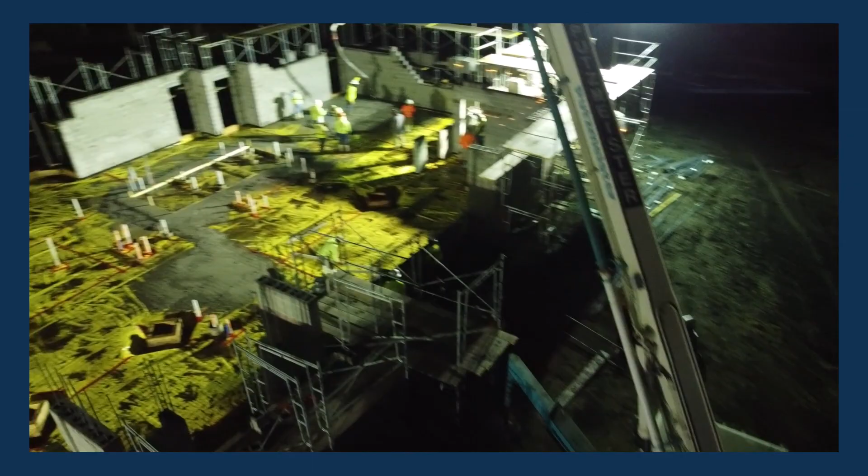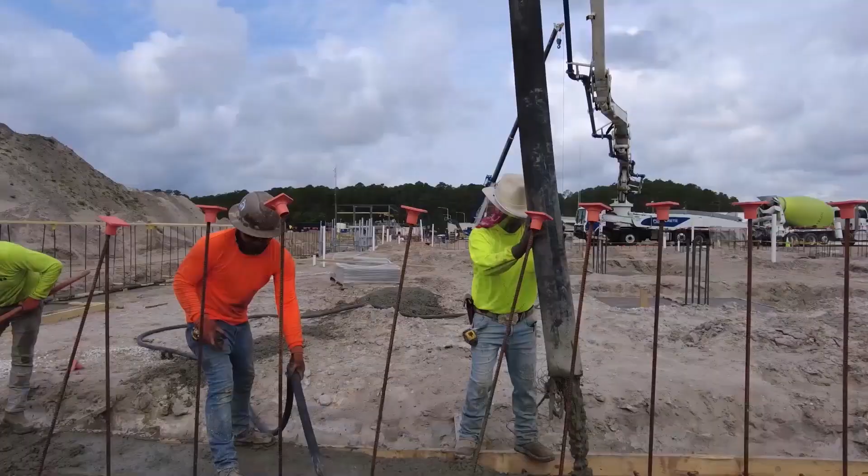Think of construction, one of the first things that come to mind is concrete. This widely used construction material is literally the backbone of the construction industry. But before we can become successful in the concrete scope of work, we have to understand the precautions we must take to ensure our safety and the safety of others during concrete operation.

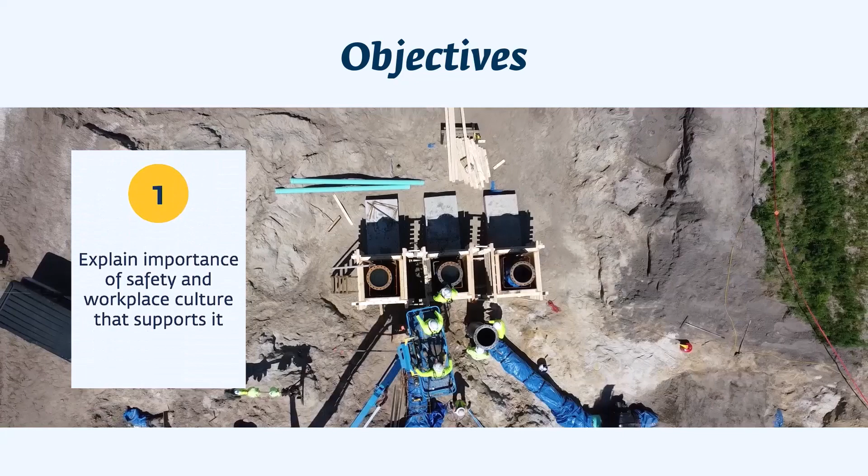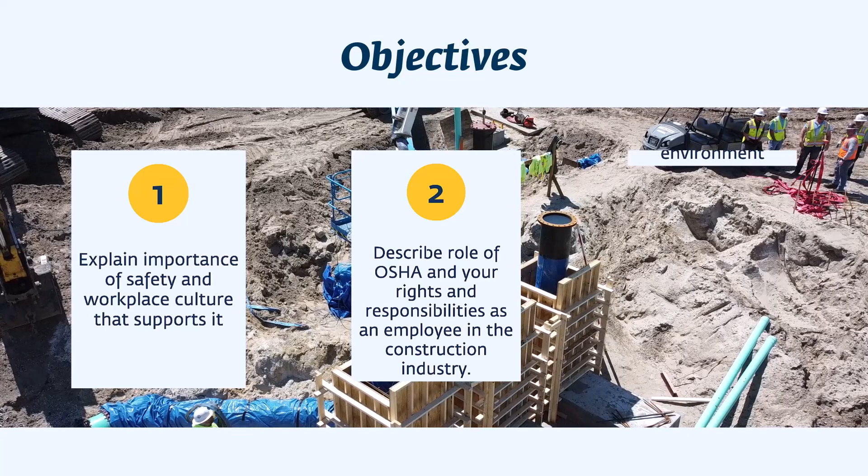Our objectives for today are: first, we need to understand the importance of a well-working safety culture in the workplace and how you can support it. Second, describe the role of the Occupational Safety and Health Administration and what your responsibilities and rights are. Lastly, identify common types of hazards on site that can cause serious injury or worse, a fatality.

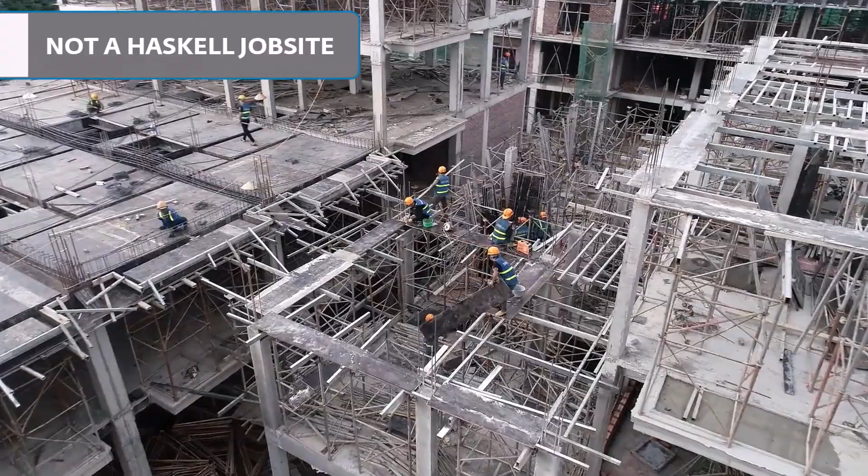So what does a job site look like that does not have a working safety culture? There are a couple of things you can almost immediately point out when you observe the activity on site. One of the first things you will notice is a lot of at-risk behavior: nobody's tied off, housekeeping is poor, or individuals jumping over spots that have no access.

Another thing you will notice is poor planning for the operation. No one seems to have what they need, and people generally look lost. Then there's the lack of training: operators with no seatbelt on and craft walking down ladders without three points of contact. Basically, the job site has developed a culture that has failed to support their craft and give them the tools they need to recognize hazards, to not only protect themselves, but others around them.

And we all know that truly experienced craft workers understand the commitment to safety, and that their hazard recognition abilities will be tested every day out on the job.

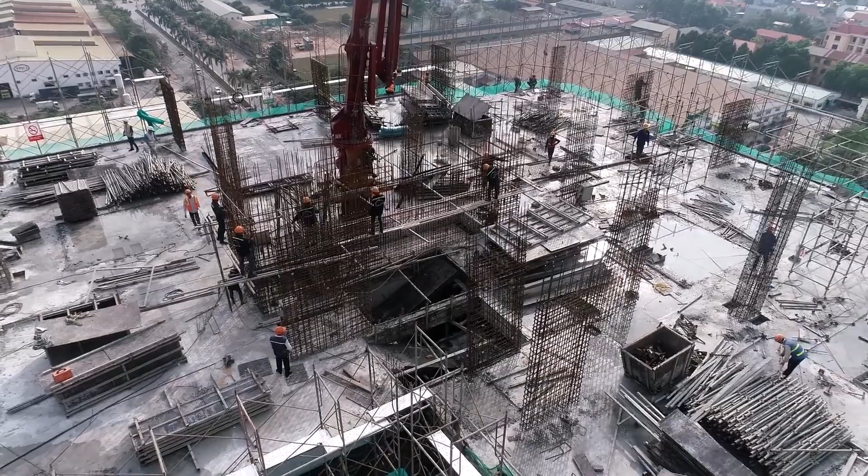If you are still confused on the importance of safety, then let me spell it out for you. We don't want anyone to get hurt or die in the process of construction. We spend more time with each other than we do with our own families, and we should all make sure we get back to them with all our fingers and toes. That's why we are committed to keeping you and everyone around you safe.

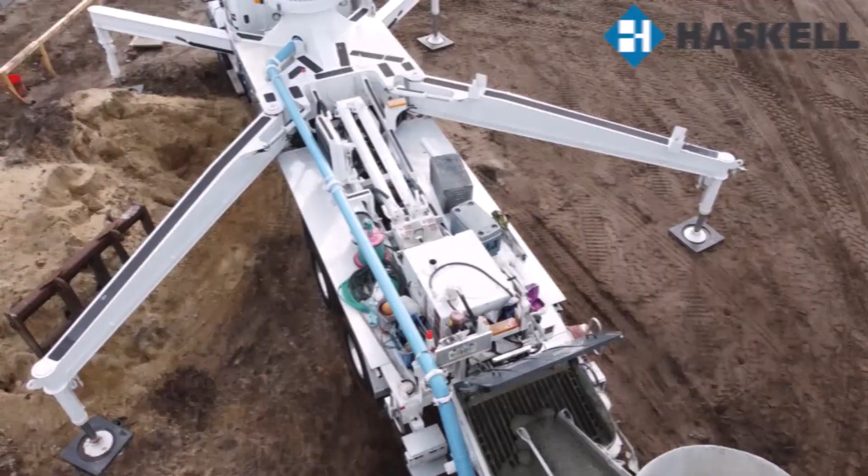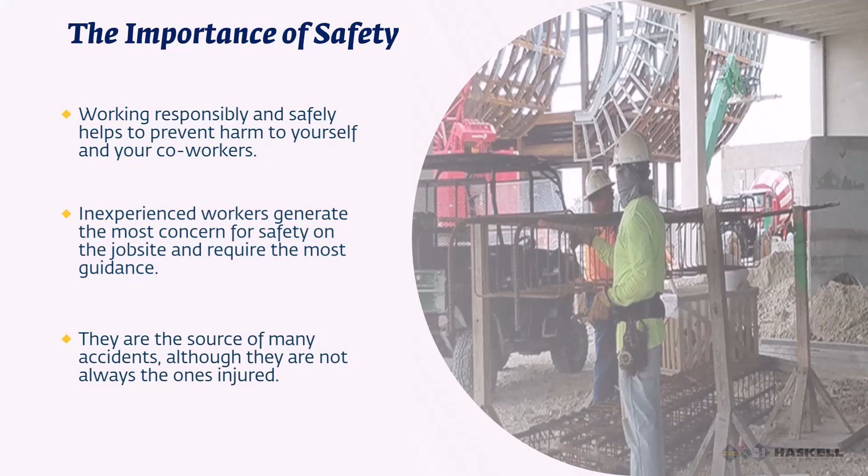But here's the thing, we cannot do it without your help. We need everyone working responsibly and safely to ensure our main goal to provide a healthy and safe working environment. We encourage you to help our inexperienced craft with hazard recognition, because we all know they are at the most risk, and they are in many cases the source of the accidents and near misses on site, even though they are not always the one getting injured.

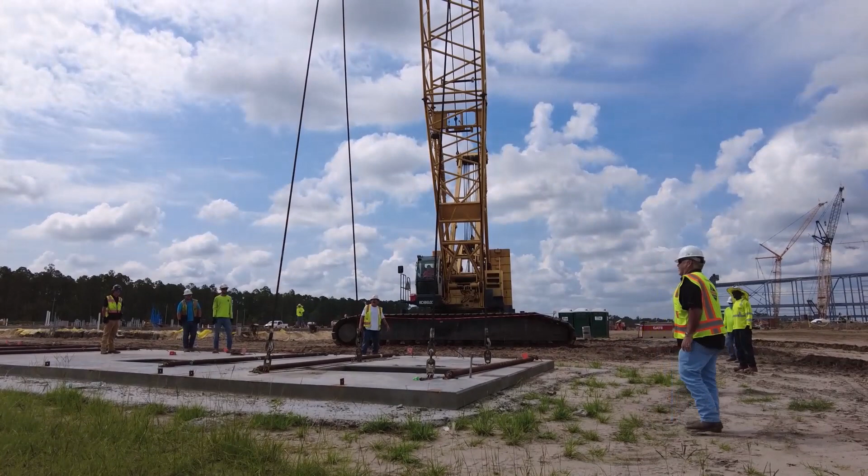So when you get a chance, mentor our inexperienced craft on hazard recognition, and who knows, the life you save may be your own. At this point, you may be asking yourself what makes an effective safety culture.

Well, let me tell you. First, we need to have or maintain a sound safety policy, which we do have. This policy needs to be understood and incorporated out in the field with a good attitude.

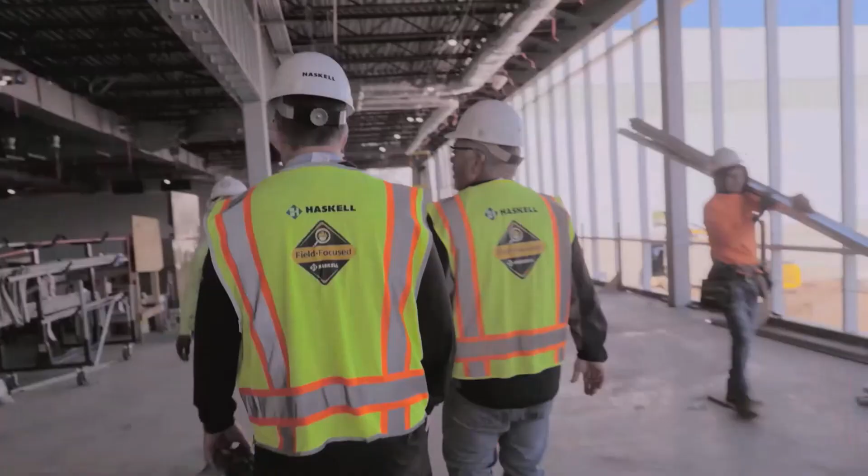Second, this policy should be communicated throughout our leadership, both in the field and in the office. We must leverage our strong leadership skills out in the field to involve and encourage the commitment of our policies by our craft, subcontractors, and field personnel. Remember, if the policy is not understood, agreed upon, or not effectively communicated, the policy will not translate out in the field where it is needed the most.

And finally, we need to actively train our personnel with positive reinforcement on the necessary safety skills needed for each type of operation, as well as how to adapt to the changing conditions of our projects day to day.

Let's take a closer look at the role of the Occupational Safety and Health Administration. It is their mission to enforce that companies provide a safe and healthy environment. To do this, they have created several parts of the Code of Federal Regulations. In construction, we focus on parts 1926 and 1910.

1926, concentrating on construction, and 1910, containing the general industry standards. With these standards, we have all the information we need to ensure we can create site-specific safety plans and job hazard analysis forms to promote our safety culture.

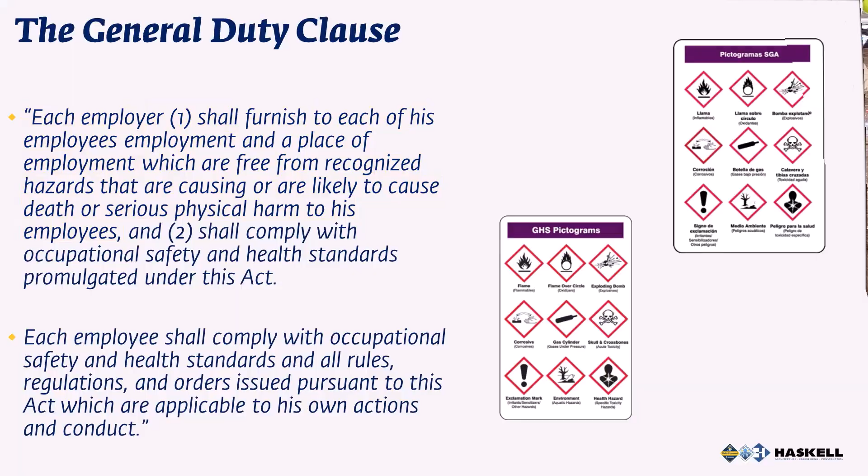But what are you and your employer's responsibilities? Well, under the General Duty Clause, each employer shall furnish to all employees a place that is free of hazards that can cause death or serious injury. They also must provide training and personal protective equipment for operations that have these types of hazards.

What about your responsibilities? You have to follow the safety rules, wear personal protective equipment, and participate in the training provided by the employer. I also like to mention that you have the right to address any issues with your supervisor and report any issues if not corrected.

You are also protected by Section 11C of the OSH Act from any discrimination or discipline if you do decide to report any issues. For more information, I encourage you to reach out and get your 10-hour safety course where you can learn more about this subject.

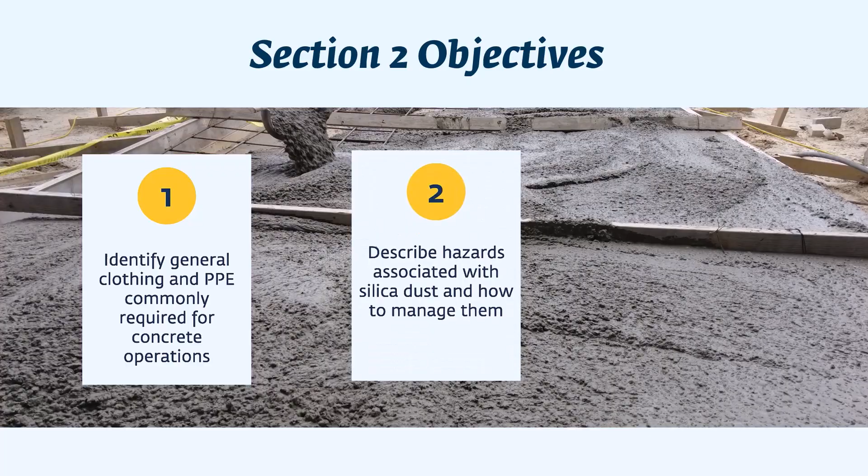There are several ways that concrete can be a hazard: skin contact, inhalation, and the handling and forming of the concrete. Let's first focus on skin contact.

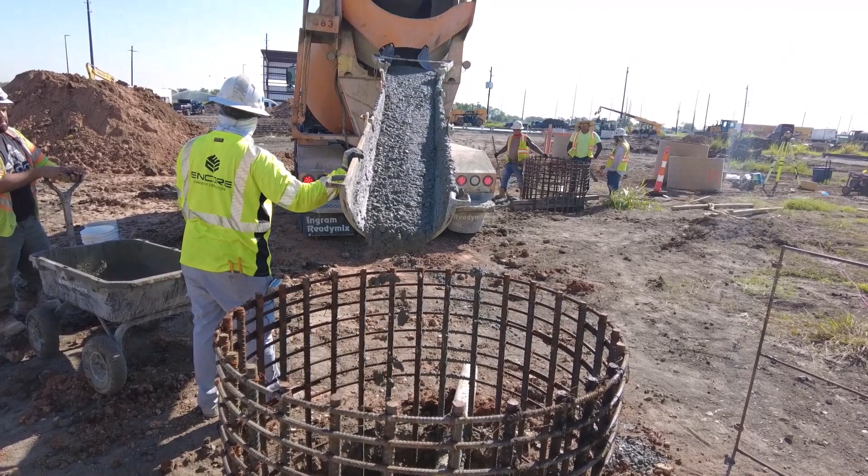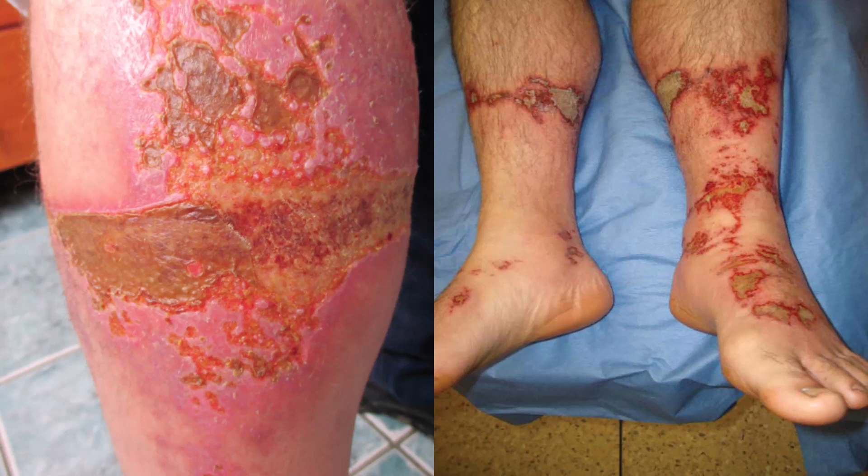For many people, concrete can have adverse effects to their skin and health when they come in contact with it. Cement is alkaline, or has a high pH level. Cement is highly caustic or corrosive. Once you mix dry cement with water, it has a pH of 10 to 12 on a scale of 14. That level of pH is high enough to cause chemical burns on unbroken skin with extended contact.

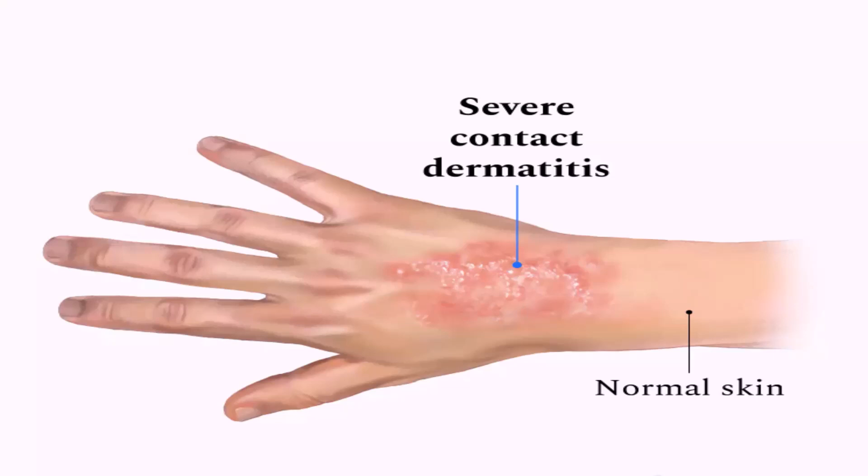If that's not enough, Portland cement also contains the metal hexavalent chromium. It's the toxic chromium that sensitizes your skin and causes contact dermatitis. Hexavalent chromium has been classified as a carcinogen, or causes cancer. Certain epoxies, accelerators, water reducers, superplasticizers, retardants, and other admixtures in concrete can also have a sensitizing effect.

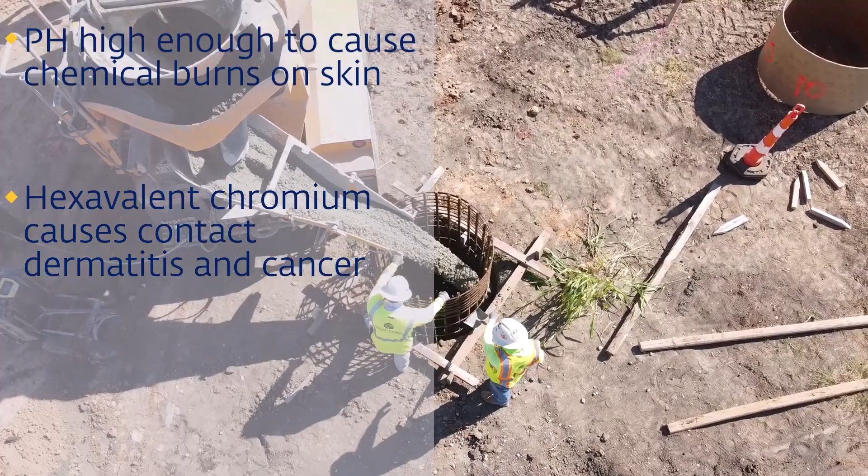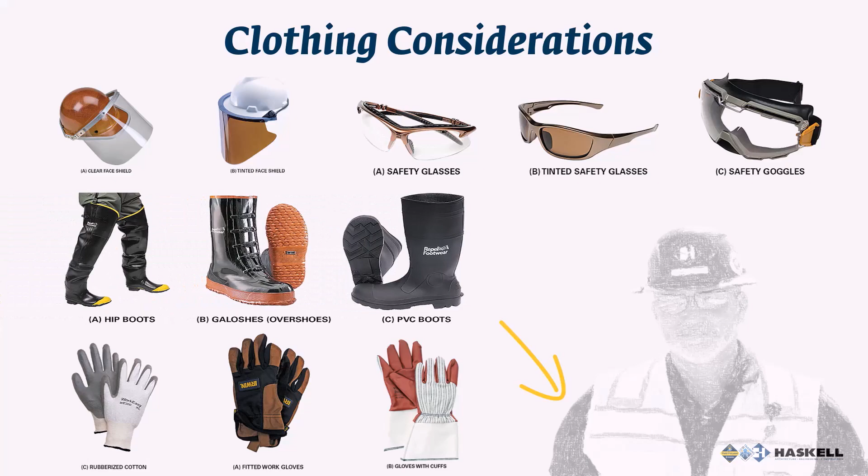Concrete is also highly abrasive, creating microscopic cuts and scrapes on your skin. This allows the alkaline, toxic substance to contact deeper tissues and worsen the injury. That is why we must use the right personal protective equipment, such as gloves, long-sleeve shirts, safety glasses, face shields, and waterproof boots to prevent the concrete contacting our skin and causing injury.

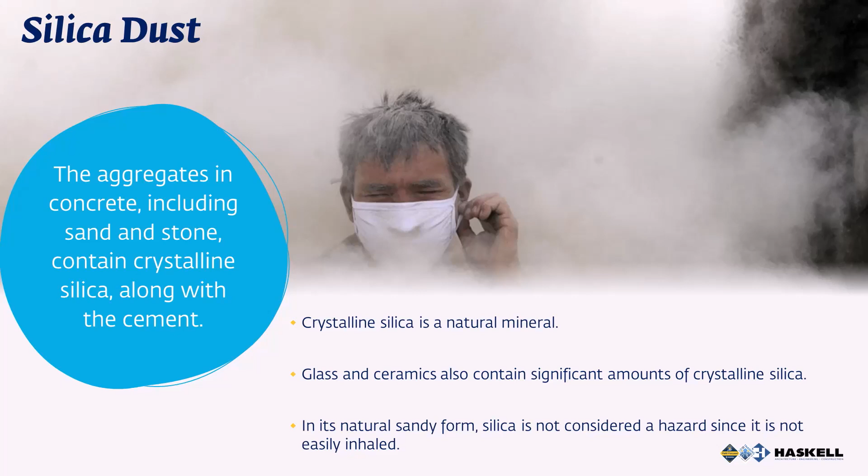And if we come in contact, we have to wash off the concrete with plenty of clean water and contact your supervisor immediately. Skin exposure is only one of the hazards, and most fail to recognize that the dust created when working with concrete can also have consequences.

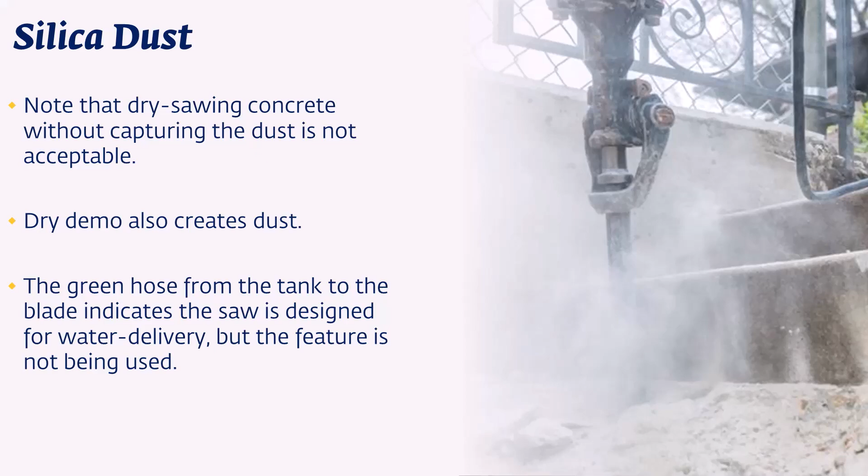Whether we are cutting control joints, grinding surfaces, sweeping the floors, demolishing sections, or drilling holes for epoxy anchors, those types of activities cause plumes of silica dust. When this dust is inhaled, silica dust particles, which are 100 times smaller than a grain of sand, enter the lungs and can cause severe and sometimes fatal diseases.

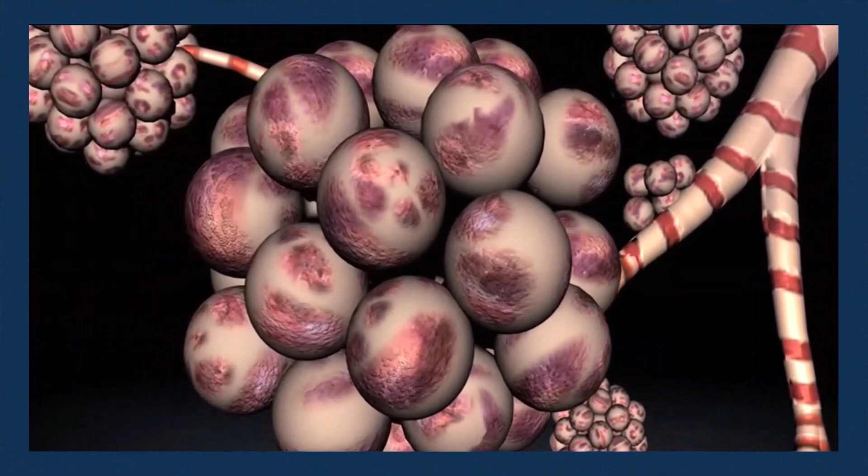This risk is exponentially increased by long-term exposure. Just think about this material collecting in your lungs and solidifying slowly, leaving those parts of your lung unable to absorb oxygen. The majority of these diseases are irreversible and many can be fatal.

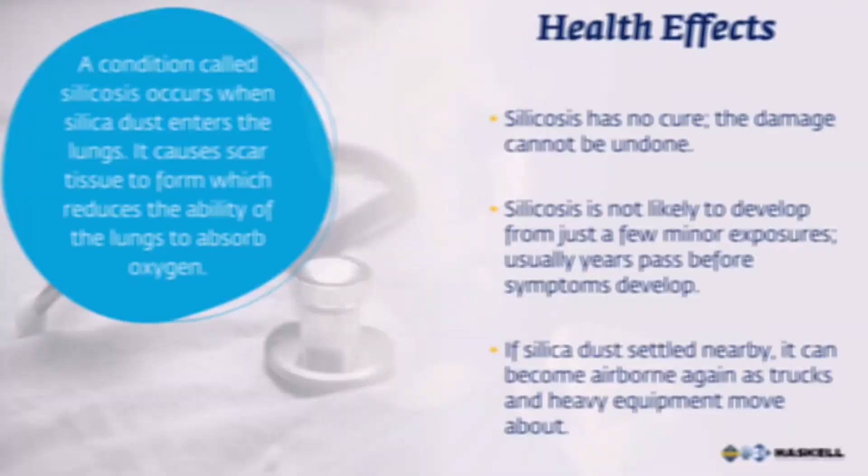Crystalline silica is a known carcinogen and can put workers at a highly elevated risk for lung cancer, chronic obstructive pulmonary disease, and kidney failure. Exposure to respirable crystalline silica has also been linked to the development of autoimmune disorders and cardiovascular impairment.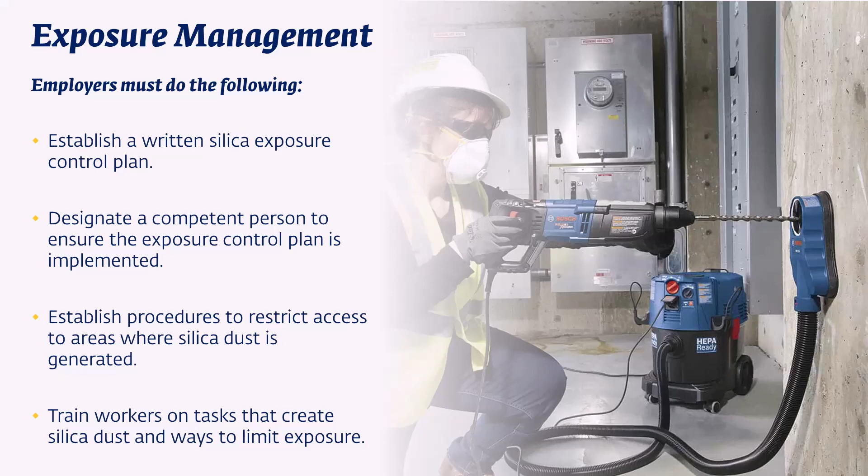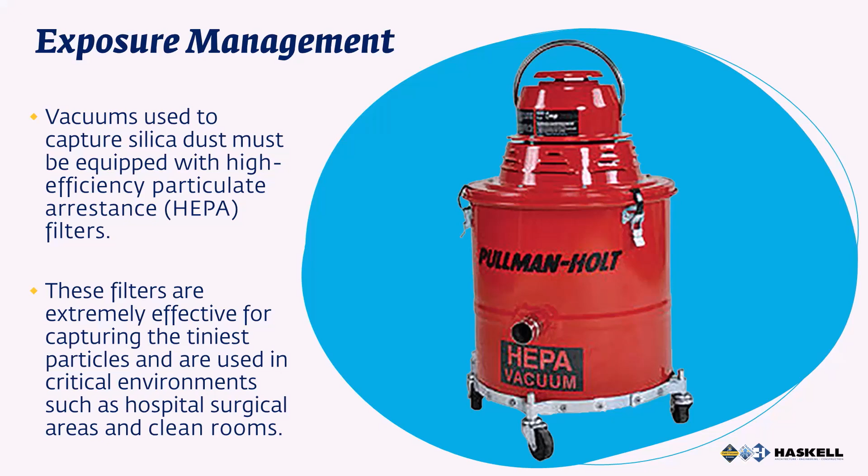We must protect ourselves and those around us when we are cutting, drilling, or grinding concrete by using exposure management. Exposure management is a plan to use water, marking off areas of exposure, vacuums for dust collection, and having the right personal protective equipment, like a mask, to protect ourselves and others in the area.

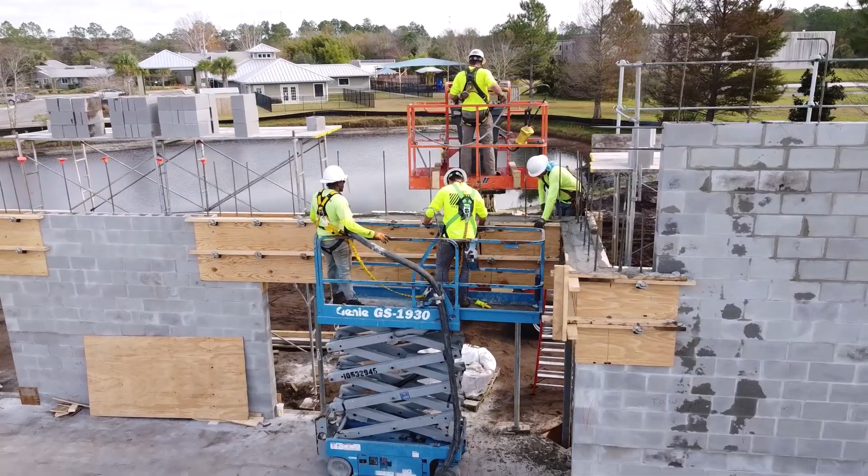Now that we can understand the hazards of skin exposure and inhalation, we can focus on the handling and forming hazards of concrete. Each concrete operation should be carefully planned and communicated before any activities start.

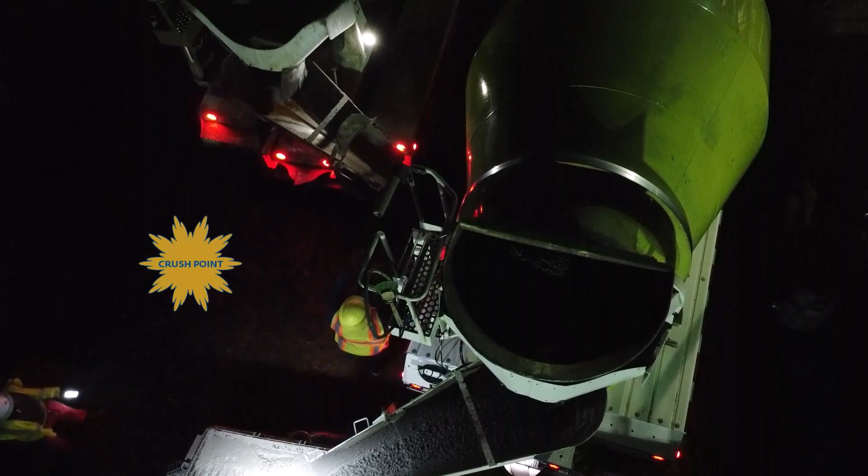Concrete is delivered to the site in two ways: by truck or by hand. If we are getting the concrete by truck, we can expect a fully loaded truck mixer that typically weighs approximately 30 tons to show up. Most of the time, these trucks will have to be backed into position and will need a spotter. Poor ground conditions can lead to delays or rollovers.

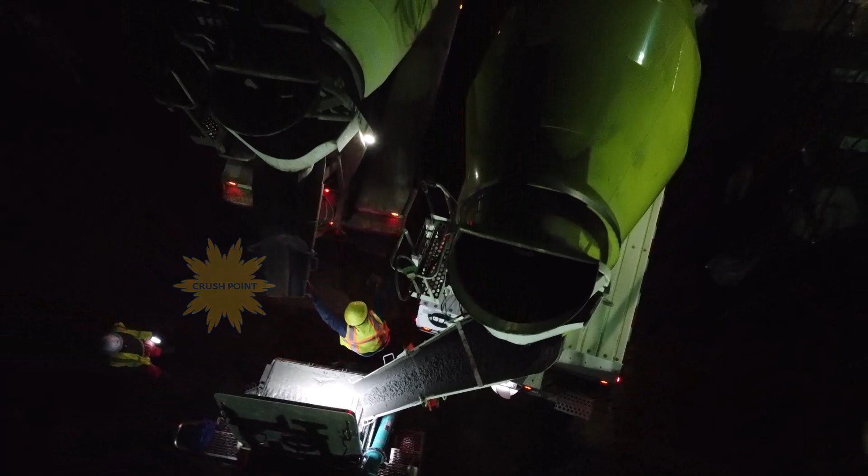Also expect caught-between hazards and equipment crush points when backing up the mixer to either the pump truck or close to the placement area. When shooting the concrete, it can splatter drops around the hopper or forms which could come in contact with your skin.

Having eye protection and other PPE to cover your skin is a must. Mixing on site can be hazardous as well.

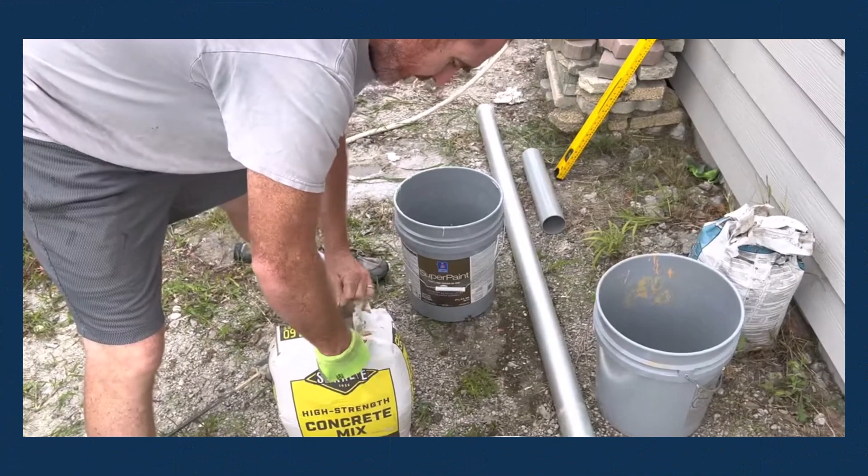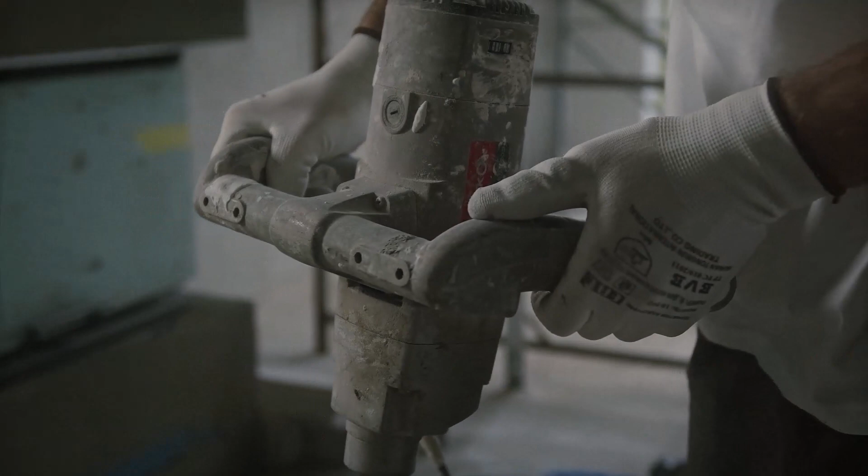Transporting 60 to 80-pound bags of concrete, if lifted improperly, can cause back strain. Opening the bags releases silica dust into the air. Mixing the concrete in the buckets releases dust and splatters droplets that can come in contact with your skin.

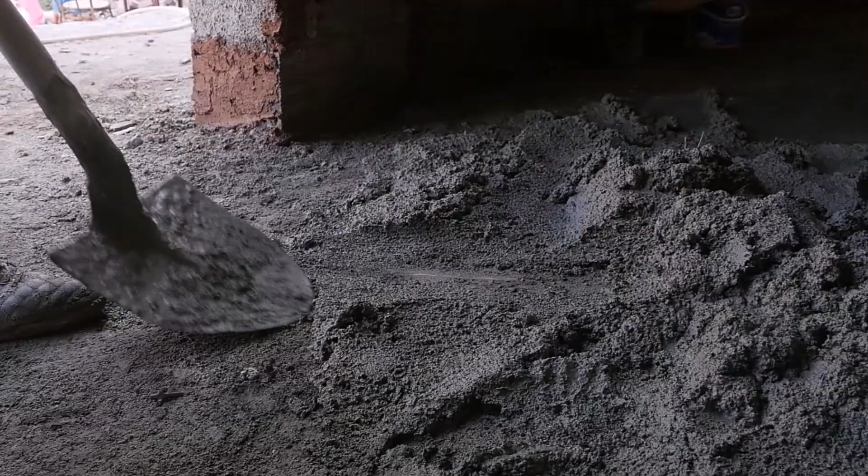Improper use of the hand shovel can twist your wrists and cause spraining. Bringing those loads to the area by hand can lead to other types of awkward movements that can cause further sprains or falls. Most of the time, transporting concrete by hand is cumbersome and requires an amount of energy from the crew that can be exhausting. So we like to use equipment to transport our loads of concrete to the placement areas.

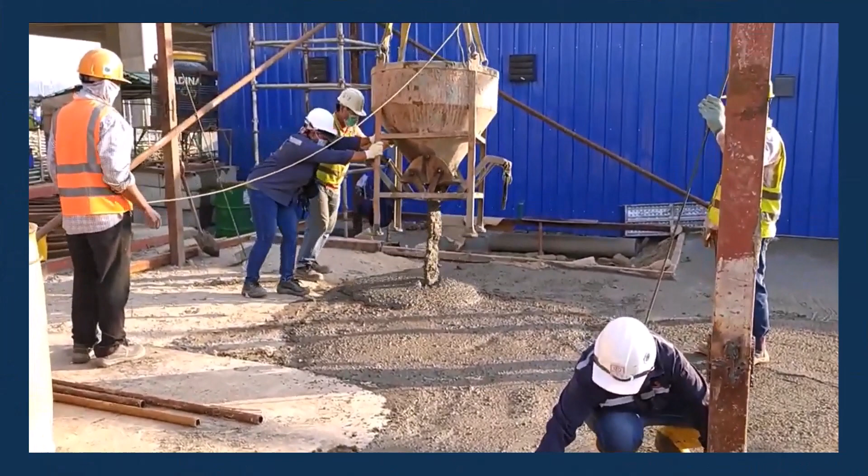There are 3 basic types of equipment we will use to do so. For short, level runs, we can use the wheelbarrow. A useful tool, but can also be a hazard if it is overloaded or the access to the placement area is not cleared and prepped for it.

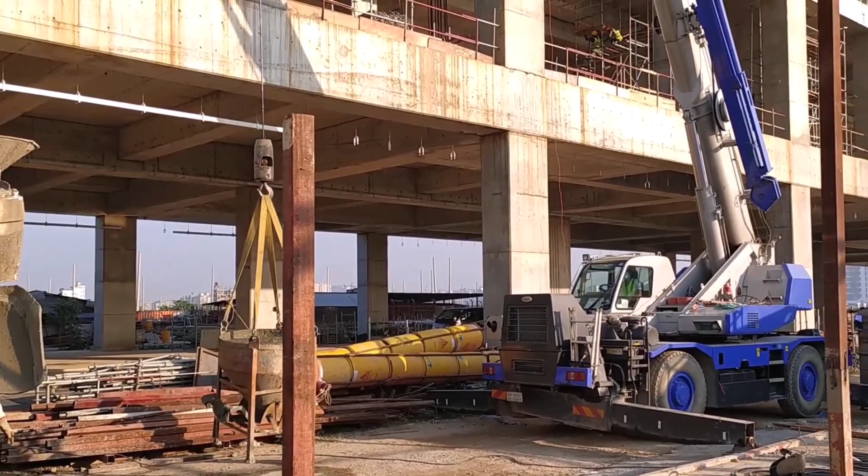Concrete buckets are great, but the risk factor is increased. We will need to understand load charts and have a pick plan in place to use the crane. With a crane comes the requirement of certified riggers, spotters, and a single crane operator. Having a 4,500-pound bucket full of liquid concrete flying over the site is risky business and must be treated in a professional manner. If even a small amount of concrete falls from the bucket, it can be deadly.

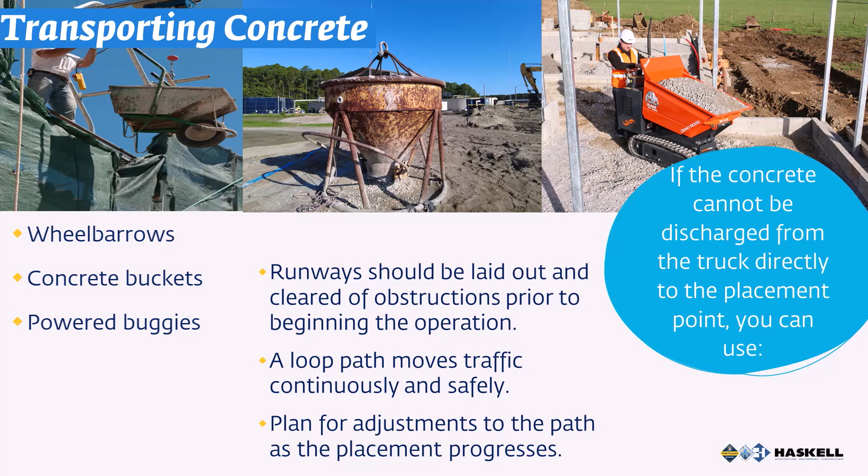Lastly, we have the concrete power buggy, or Georgia buggy. Another great way to transport large amounts of concrete, but also is heavy when loaded. Needs a spotter, pre-planned access routes, and can injure the operator or other workers in the area if not operated properly. All these types of equipment are great for transporting concrete, but all these types of operations still need to be planned and communicated to the entire team.

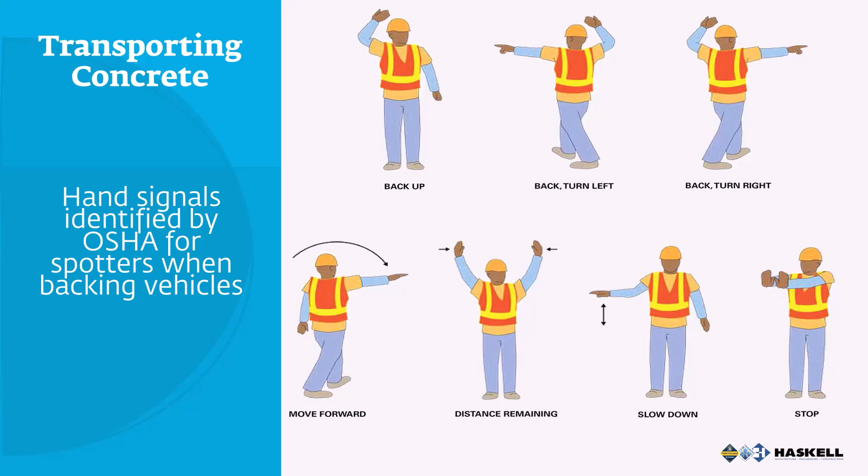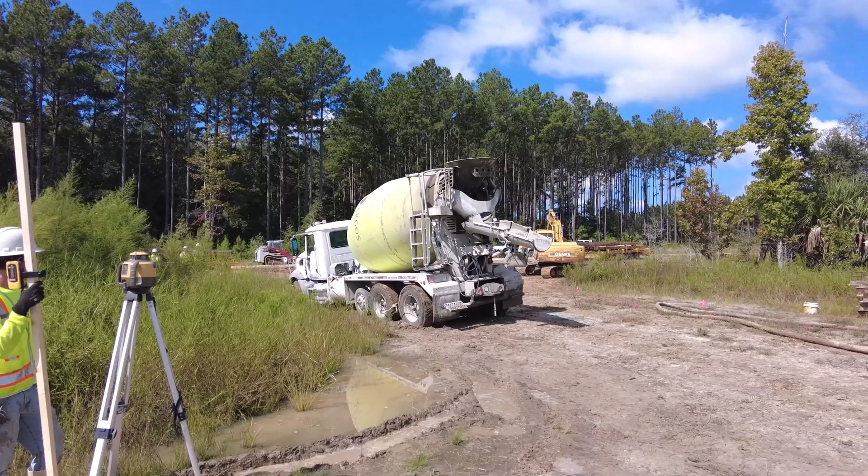When communicating the plan with your team, here are some hand signals identified by the Occupational Safety and Health Administration for spotters when backing up equipment. Before each operation, make sure both the operator and the spotter understand these signals. A properly developed plan will include these signals and will review them, so we are using clear communication out in the field. There have been many documented incidents where the operator and spotter failed to communicate the hand signals properly, which led to injury. Don't let that situation happen on your site.

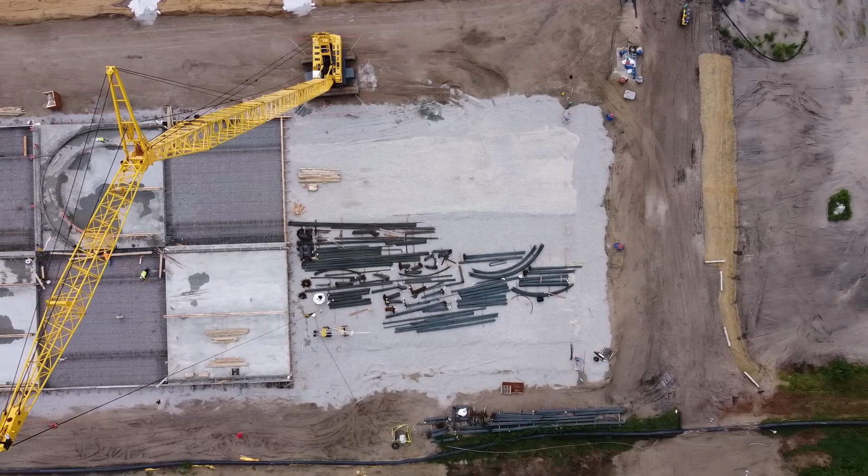We also have to consider formwork to be a part of our concrete safety discussion. Not only is the formwork difficult to construct, but there are plenty of hazards during this operation. During horizontal formwork, it is easy to have slips, trips, and falls over the edge forms or while on the welded wire mesh. Dowels can be protruding from the rebar mats to tie into the soon-to-be cast-in-place walls or masonry. Make sure that all exposed rebar is capped to prevent injury and always keep your eyes on your path.

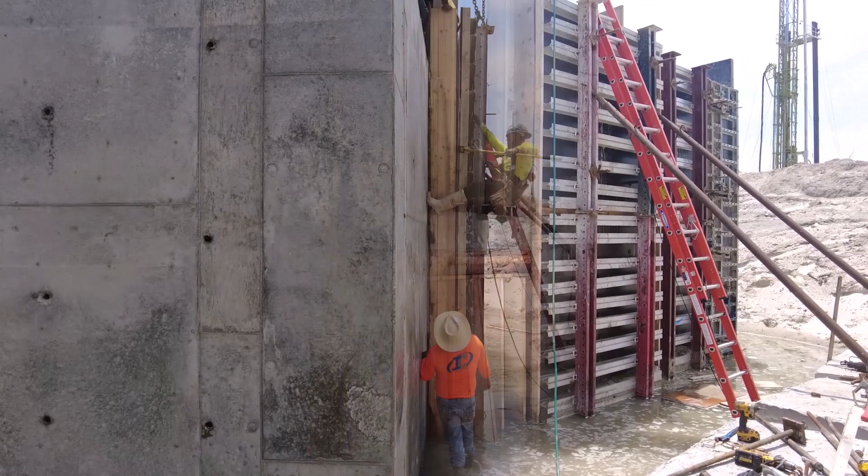Access is key and must be planned out. Remember to never run or engage in horseplay. Climbing up vertical formwork is forbidden unless you have been part of the planning for this operation and the proper provisions for fall protection are in place.

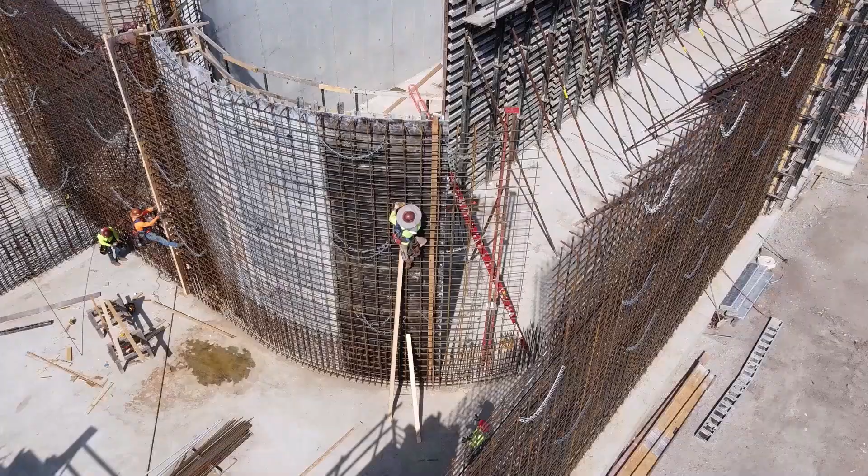Falling down on exposed rebar and mats in these types of areas is not a joke and a sure way to have a hospital visit. Just keep in mind that most of the formwork constructed is not designed to climb on or act as a walkway. Unless we are installing a reusable form system that is designed to support attachments such as add-on walkways, anchor points, or ladders, make sure you ask the competent person before climbing or walking on the formwork to be sure it can support your weight.

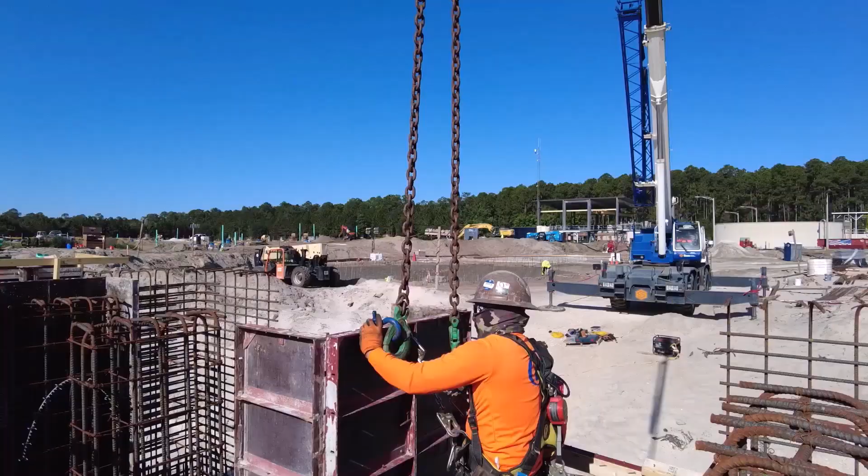Forms are designed to hold imposed loads from a specific direction, usually the head pressure that the concrete is creating from the inside of the formwork. When climbing above 6 feet, we will need to utilize some form of fall protection like a harness, lanyard, and suitable anchor point in place before walking or climbing on the forms.

Every operation needs a hazard analysis during a team huddle before we start. Thanks for watching, and remember, you are the key to our company's success and safety. See you out there on site.